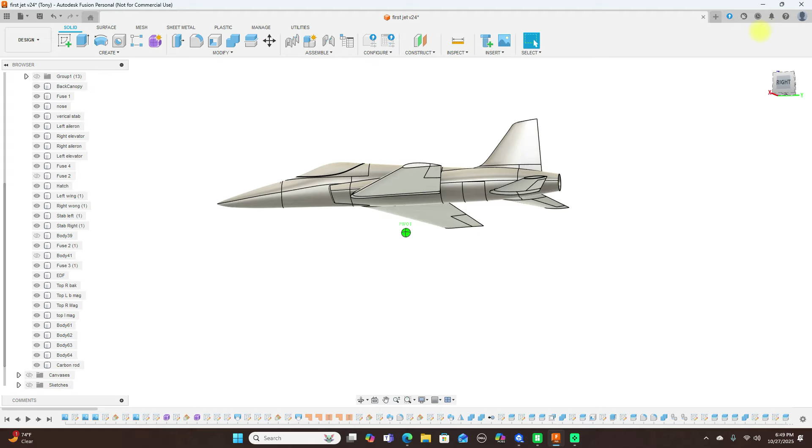Today we're going to be doing, sorry about that, we're going to be doing some more work on this first jet of ours. So, as you can see, we've done a lot. We've got our EDF in here, and this is all hollow here. So now we're going to work on the wing a little.

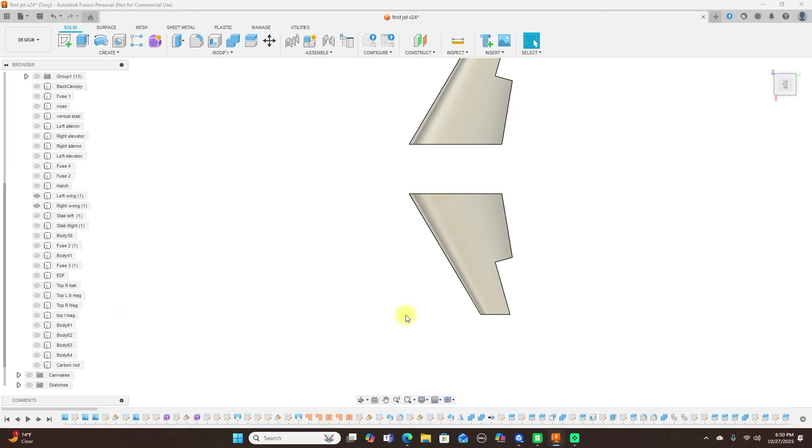Okay, so what I'm going to do is turn off all this and just leave one of the wings on. So if you've been following along with this, you should be up to this point where I am now. And turn off the right wing. Okay.

Now I want to see how long this wing actually is. So see if we can do a measure from here to here. And it's 249 millimeters. So most printers, you should be able to print this. So there's really no need to split this in half. So go ahead and close this.

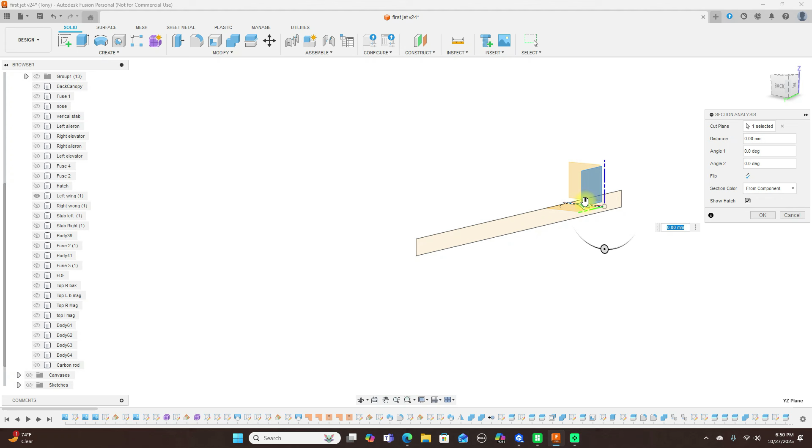And this should be a solid, which I'm pretty sure it is, but let's just make sure I haven't shelled it out. So we're doing inspect and do a section analysis. And this plane here. And it's still solid. Go and cancel this. Okay.

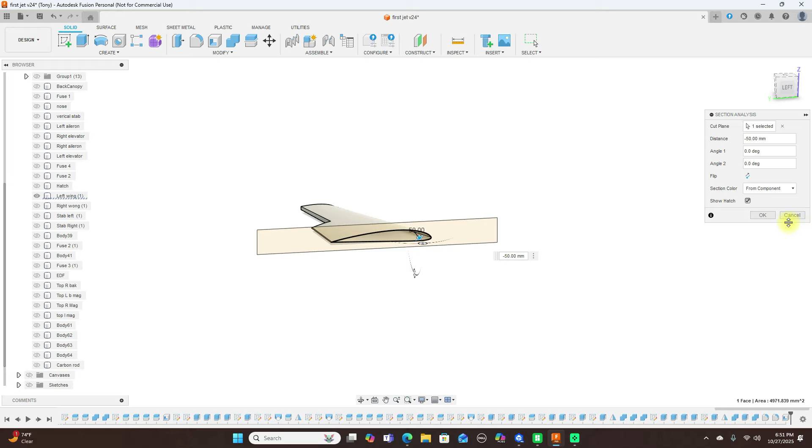Now we're going to shell this out. So we come up here to the shell command and select the whole thing. We want to shell this out to 0.4. And click OK. Now this should be shelled out. There was another section analysis. This here. And we can see it is shelled out now inside. Turn that off.

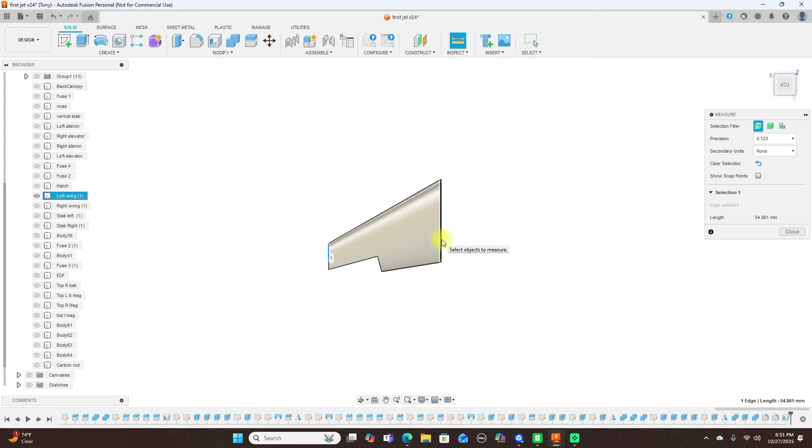Now I'm going to measure across here and see how long this is. Okay, this is 330. And cancel this. So we'll have to just split this in half. But right now we're not going to. So I'm going to create a sketch on this plane here. And turn off some of these other sketches. We don't need those right now. Okay.

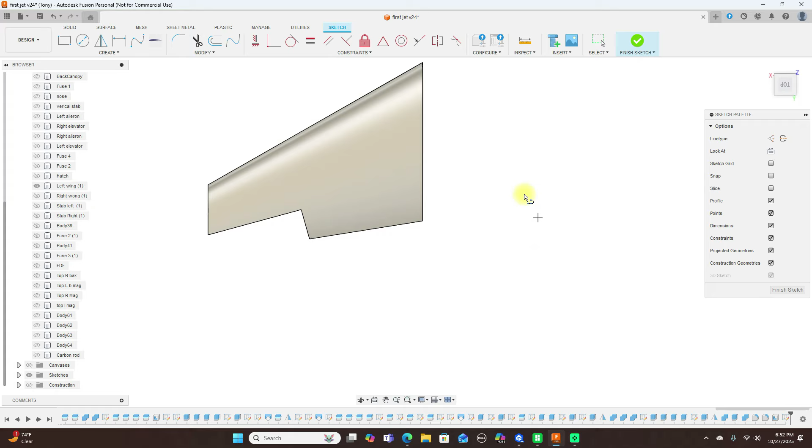Now I'm going to sketch a line to about right here. And I'm going to make a parallel one off that, so I'll use the offset here and move this up 5 millimeters. And finish sketch.

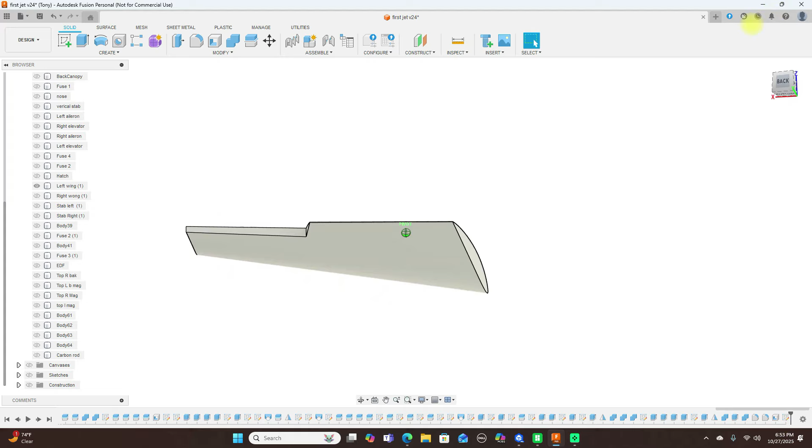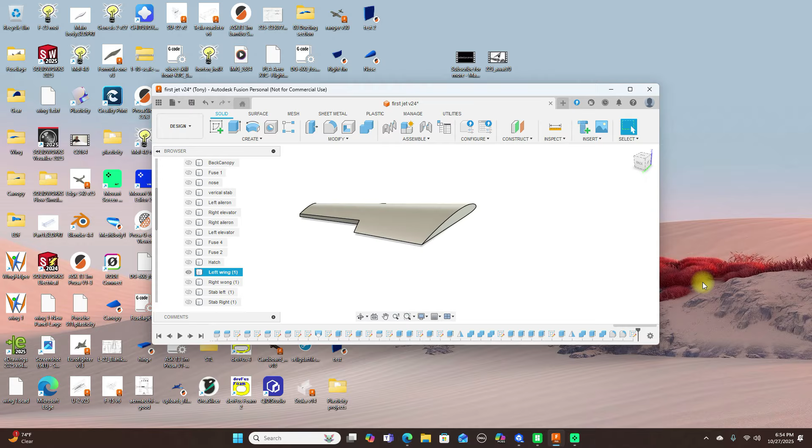Now what I should have done before hollowing this is your box for the aileron servo. So in order to do that, I'm going to go back. Take this, delete that. Okay, now this should be a solid again, so let's inspect it. And it is solid. Cancel this.

Okay, now we're looking at the bottom of the wing here. Now we need to decide where the servo is going to be, the servo box. So I'm going to put that right up here. So I've got a servo here I'm looking at, and the box I'm going to use for it is 45 millimeters by 60, 45 by 60. So

create a sketch on this plane. And we're going to use a 2-point rectangle. Okay, there's the box for the servo, and I want to move this. Let's go and finish this, turn the sketches back on, and move copy and change this to sketch objects. And select all of these.

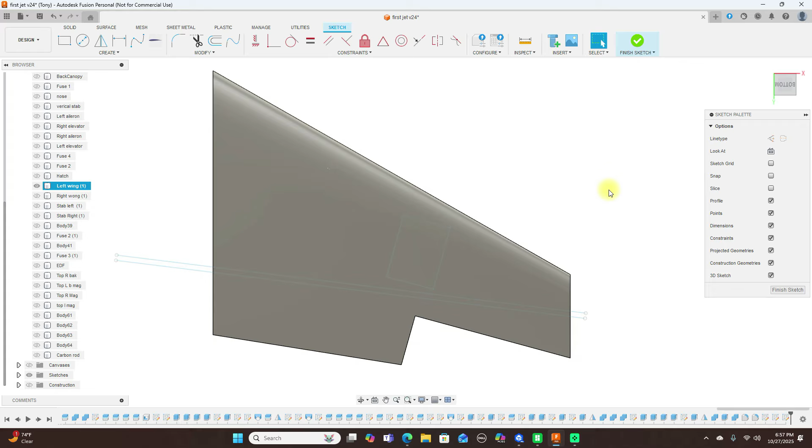Also, what I want to do is round these. So going to create a sketch on this plane here. And project this onto it. Click OK. Use a fillet. Now it won't let me do that, but that's no problem. What I'm going to do is use this here again. Or actually, cancel. I'll just use line so I can do this.

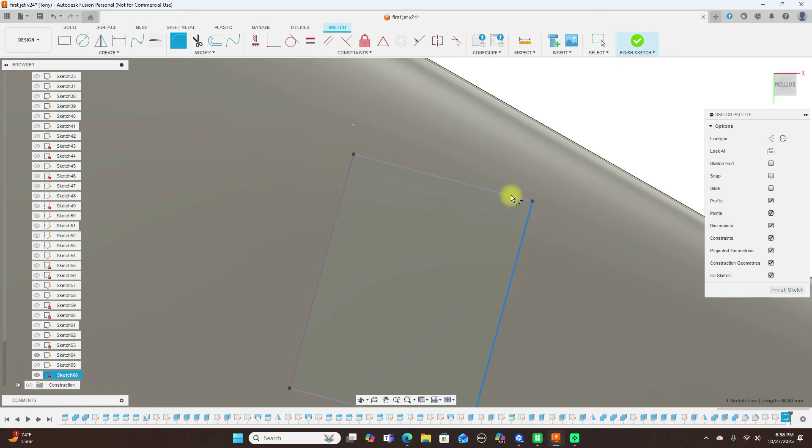Okay, now so it will let me put a fillet on this. Nope. Oh well, no worries. Go ahead and finish sketch here. And see this is on that plane there.

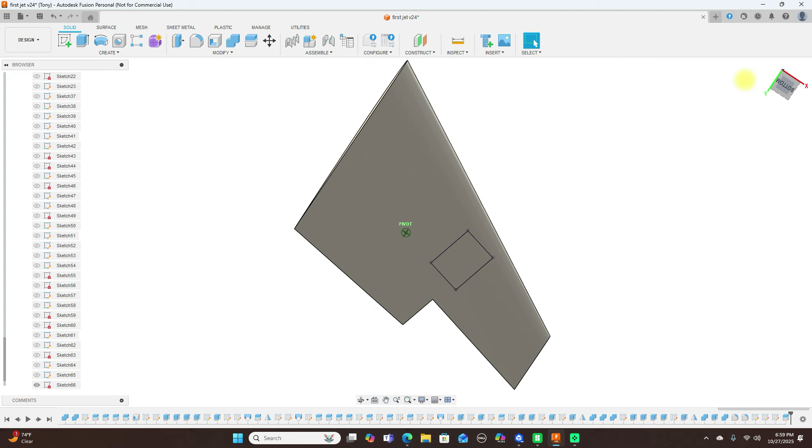Now what I'm going to do is split body and use this and select OK. Now that's split all the way through. We don't need it to be all the way through, but

so now what I'm going to do here is create a sketch on this plane if this is flat, and it's not flat. So I'm going to use, say, press pull, select this, and move this down. And that's too much. We're just going to go with 1 millimeter. And click OK. And we have that.

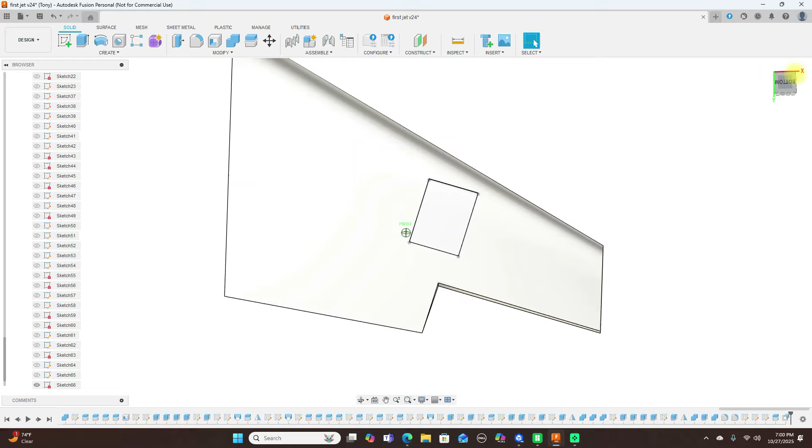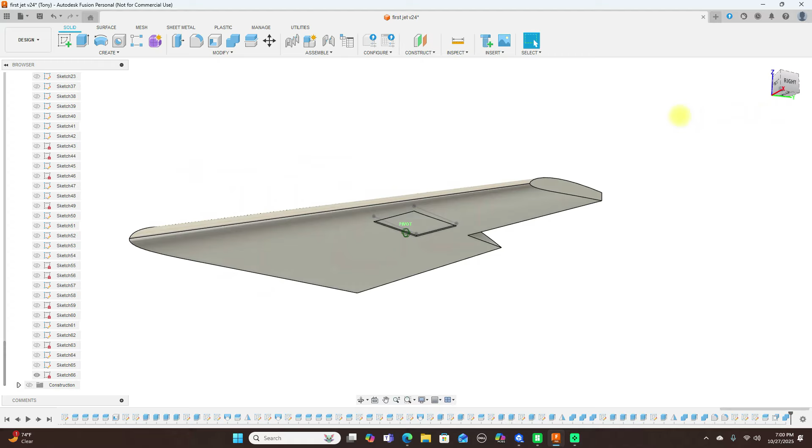Now we're going to combine this and this. Click OK. And we have that, and we have a recess down here, 1 millimeter, which you need. Now we can go ahead and shell this. So we come to the shell command, select this, and this is going to be 0.4, and click OK.

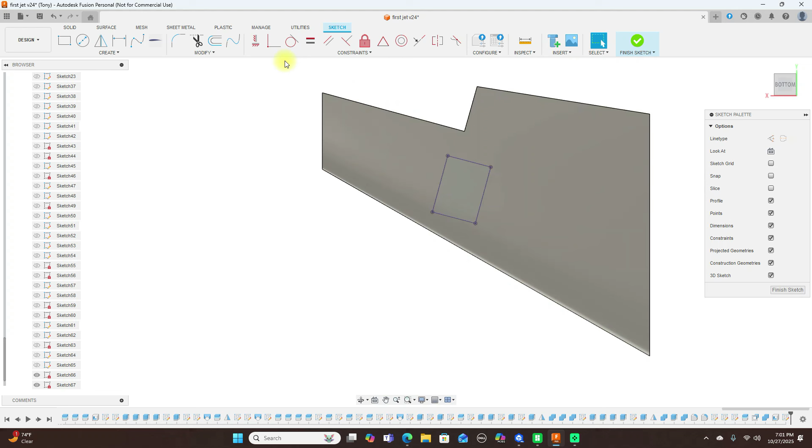And now what I'm going to do, create a sketch on this plane here. First project, cancel this. And use an offset. And move this in. -5. And finish sketch.

Now use extrude. Extrude this in. Set this to cut.

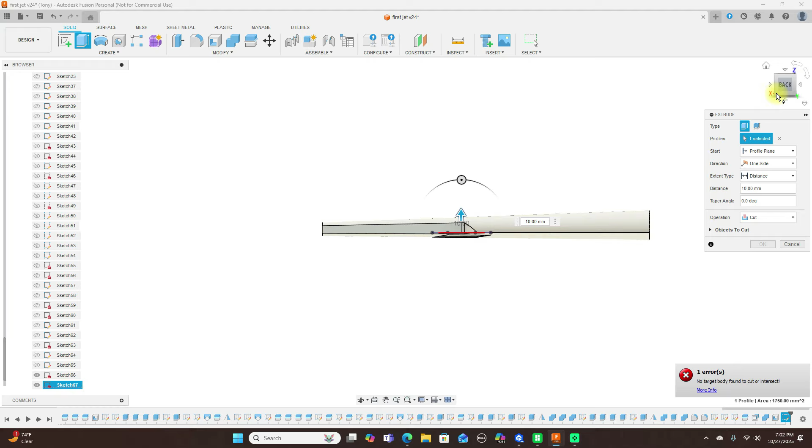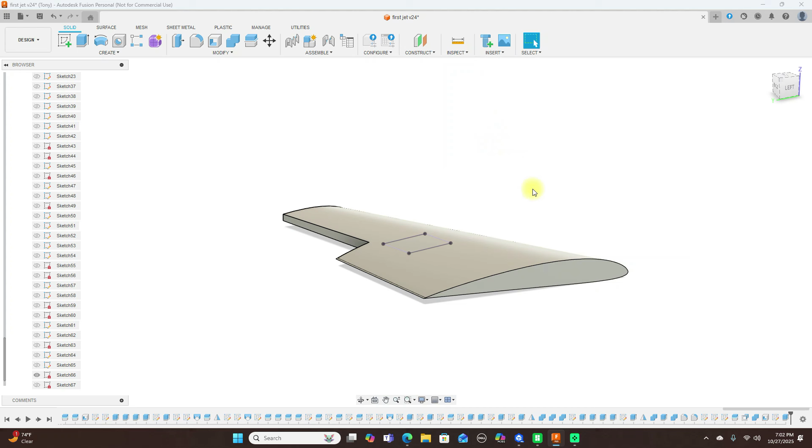Select OK. Now let's take a look at this. Section analysis. And you can see, let me turn off the sketches here. We can see inside of here where it's recessed and everything like it should be. And that's part of the hatch for the servo. Go and cancel this.

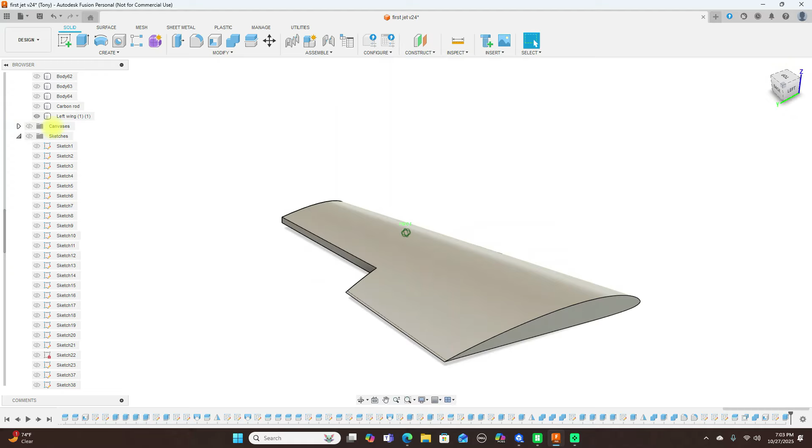Okay. Turn the sketches back on. Not that one. That's the one we want here. Now we're going to use extrude again. And change it to thin extrude and select both of these lines here. And change this to 2 sides. Move all the way up, all the way down, and change this to new body. Click OK.

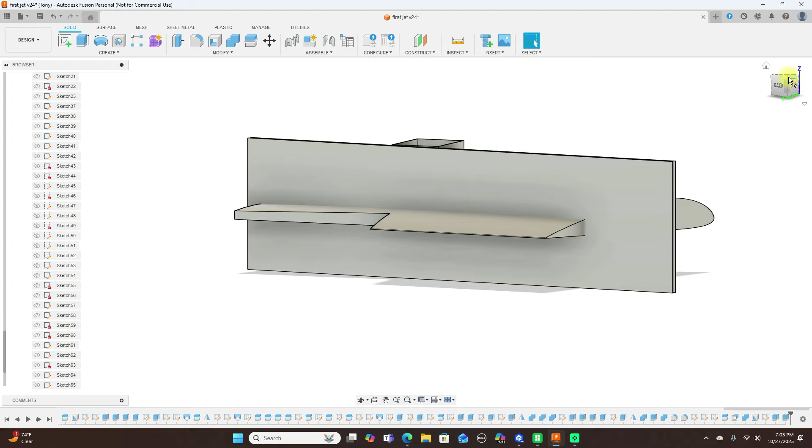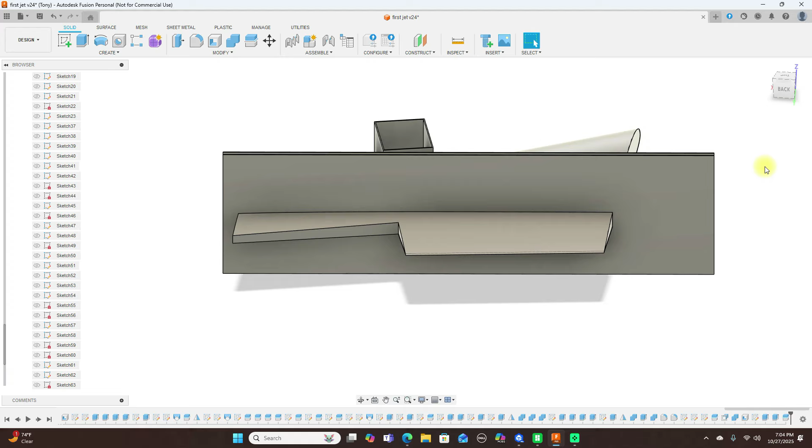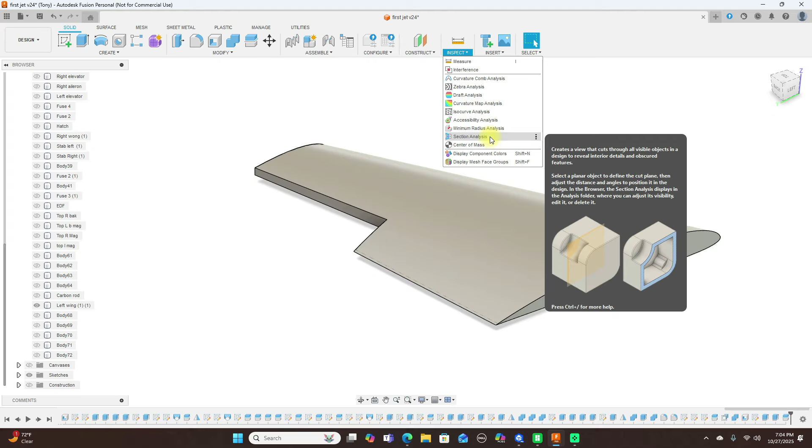Now we're going to split body. This is the body to split. This is the splitting tool, and select OK. We have that in there. Doing inspect, section analysis. And then we turn those on. And we see those down in there. Go ahead and cancel this.

Now when I extruded those, again, let me go back here and show that. Now the wall thickness, you can change the wall thickness. Here it's just 1 millimeter that I use for both of these. And I'm looking at another model and that looks about right. So we'll leave those alone.

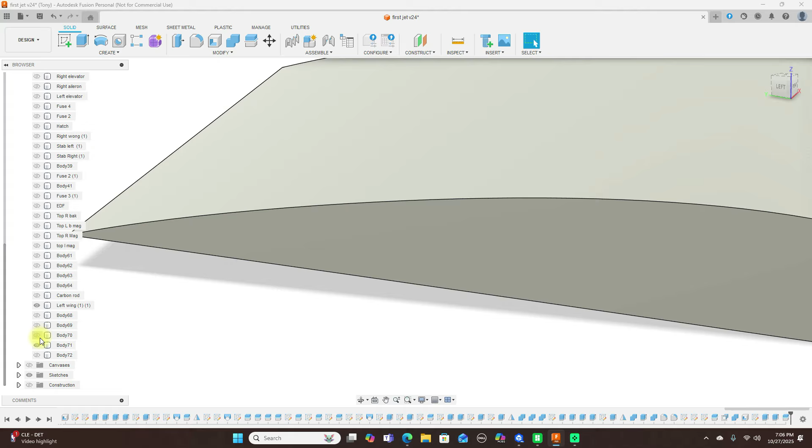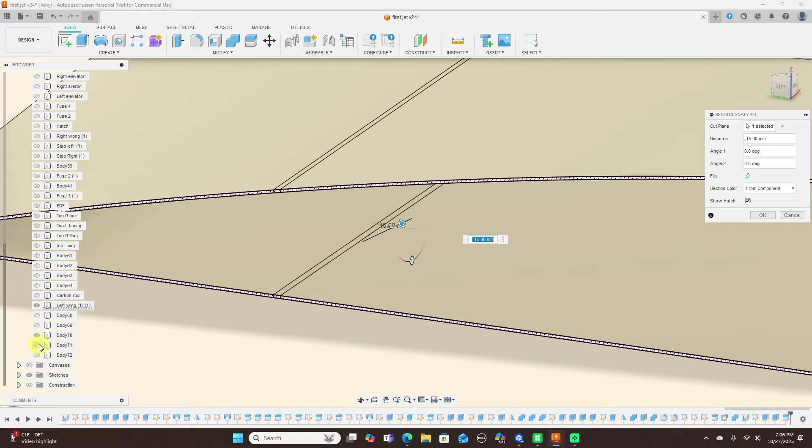Take a look at this again. Turn that off. Click OK. Now again, that should be in there.

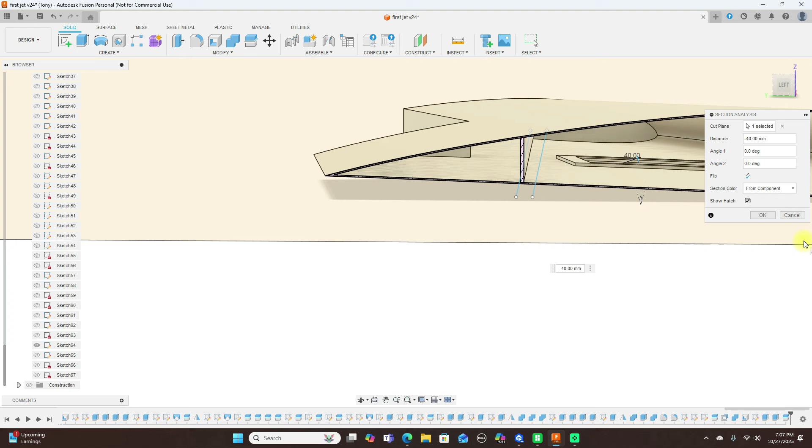The one line did not extrude, but that's no problem. Just go back and do that. So extrude, thin line, and leave it at 1 millimeter up. And change this to 2 sides and move this one down. Change this to new body and click OK.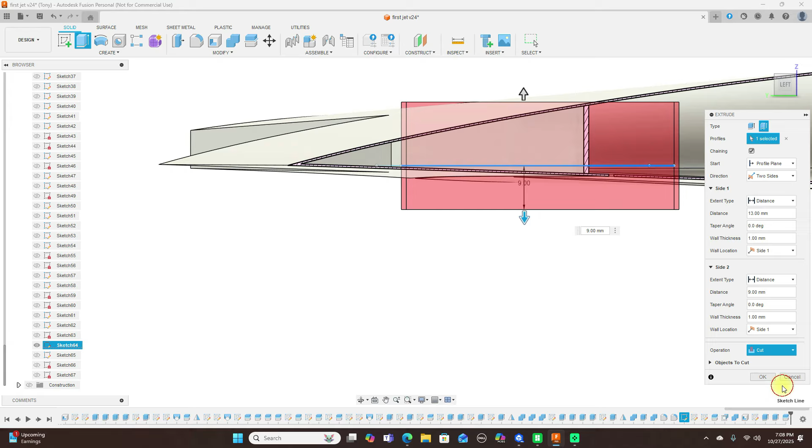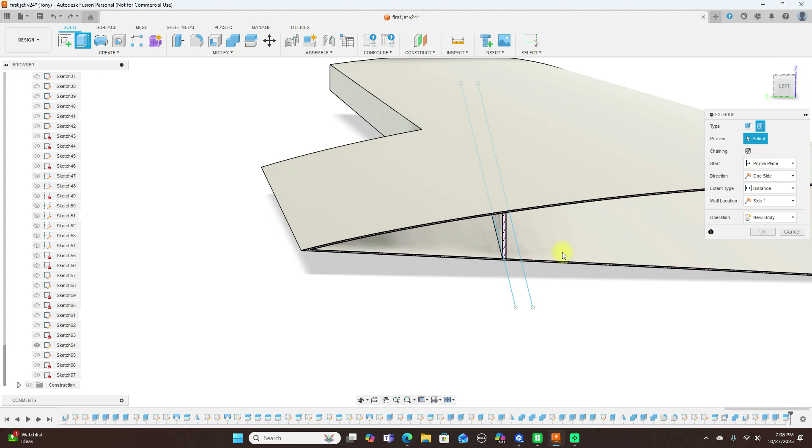Looks like that didn't go all the way through, so go back, extrude, thin line, new body, click OK. Turn off the section analysis. Now split body. This is the body to split, and the splitting tool is this. And click OK. Now we turn these off.

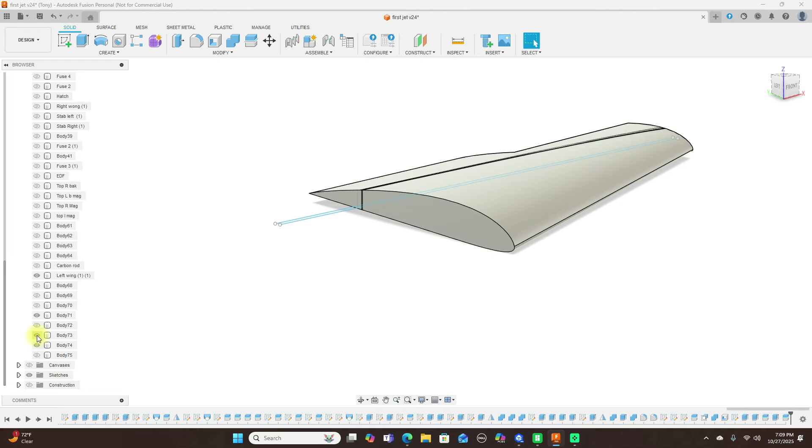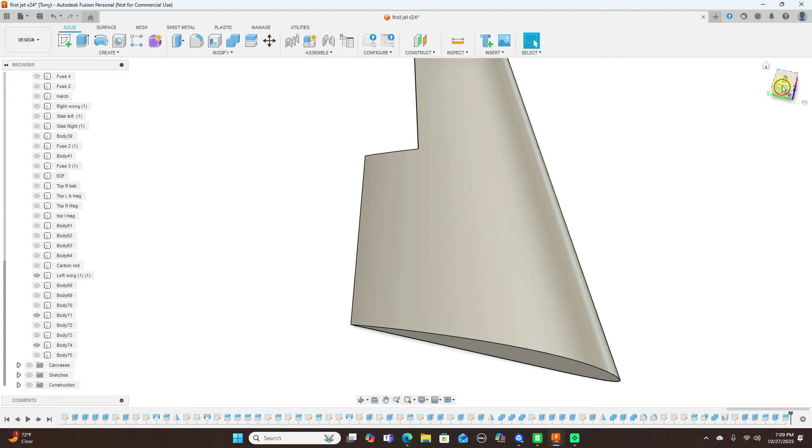And now let's look inside of here. Okay, you see both are in there now. Turn off the sketches real quick. Now, when you print this, these lines may show up, depending on your slicer program and how you have it all set up. But what I like to do is turn the left wing off here, so we have these two on here.

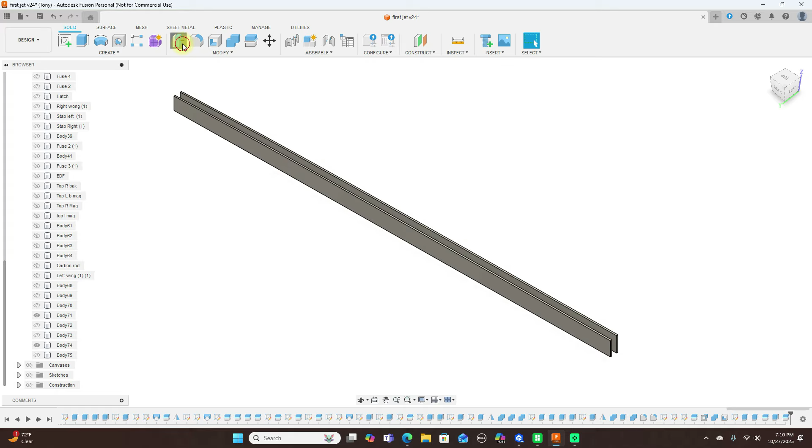I'm going to use a press pull, select this, and move this down. Move this down 0.25. Click OK. Same thing for the other side. So it's negative, sorry. Click OK.

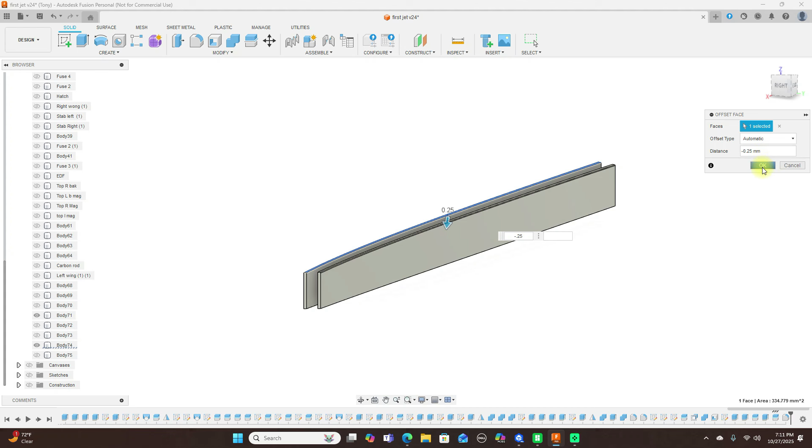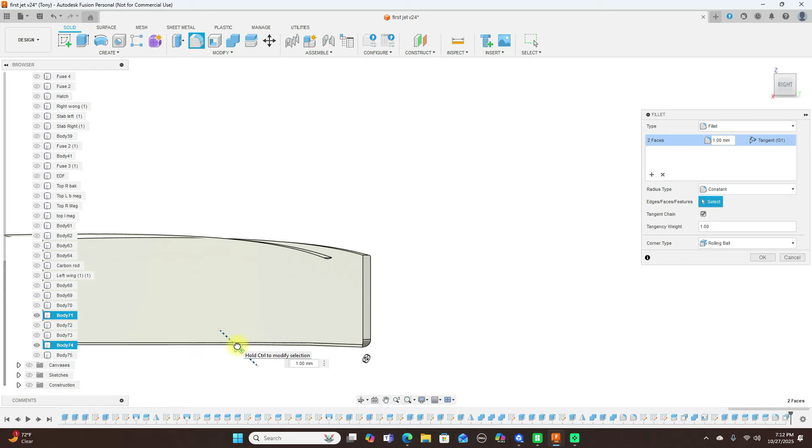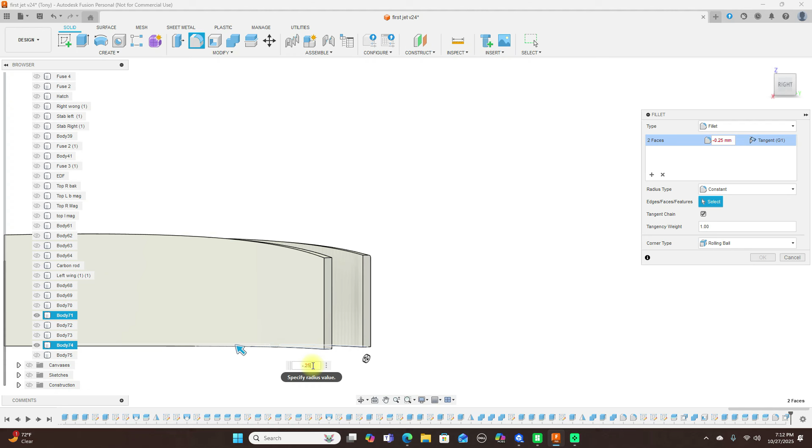Same thing for the bottom. Make sure I have this selected correct. The right face. So okay, it's not working properly, but no problem, cancel that. And I'll do it again one by one. And you could use an extrude to do this also.

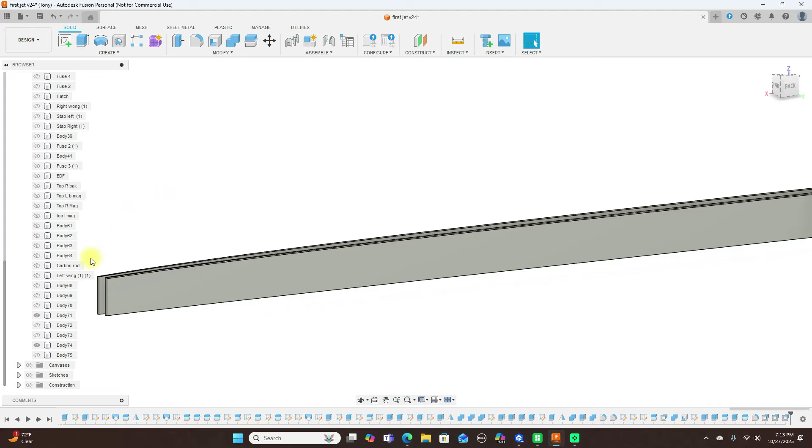And this one. Okay, we have that. Now we turn that, I believe that was the left wing, back on. And this time we'll come up here to combine. This is the target body, and the tool bodies are going to be these two in here. Make sure I got both of them. And we want to keep tools. And click OK.

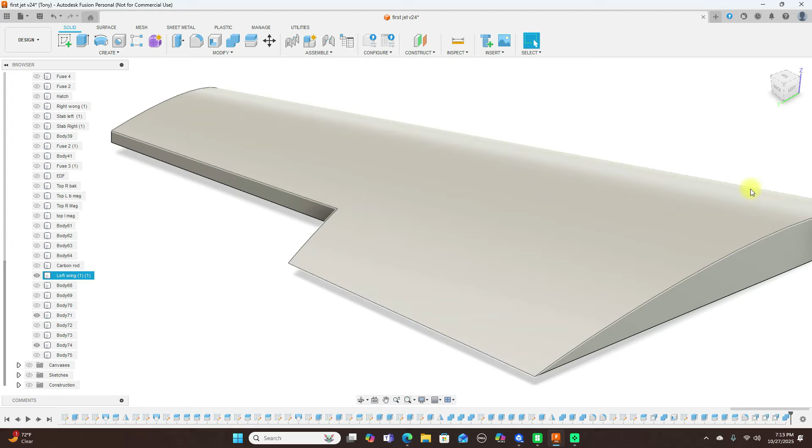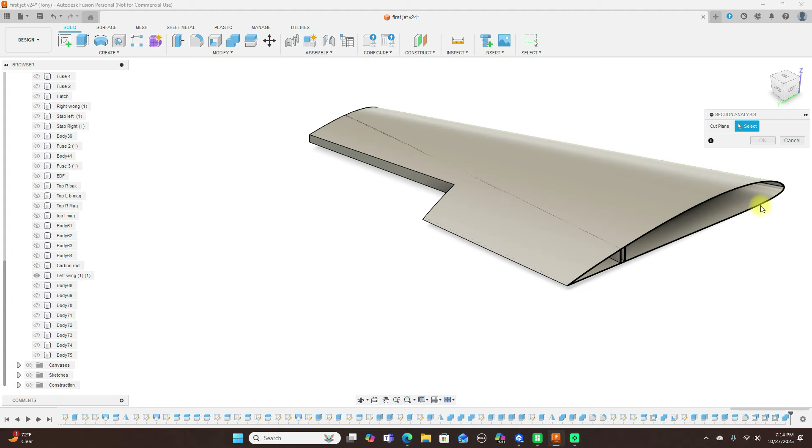Now let's inspect this inside. And we have that. And that line should not print on the top because it's down inside here farther. Okay, well, one of them I see I didn't offset enough because there's a sweep here. Okay, so to fix that, let's go back. Let me turn this off.

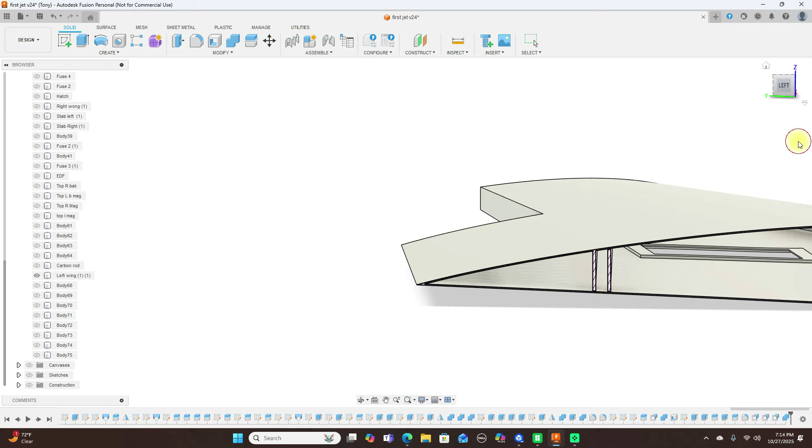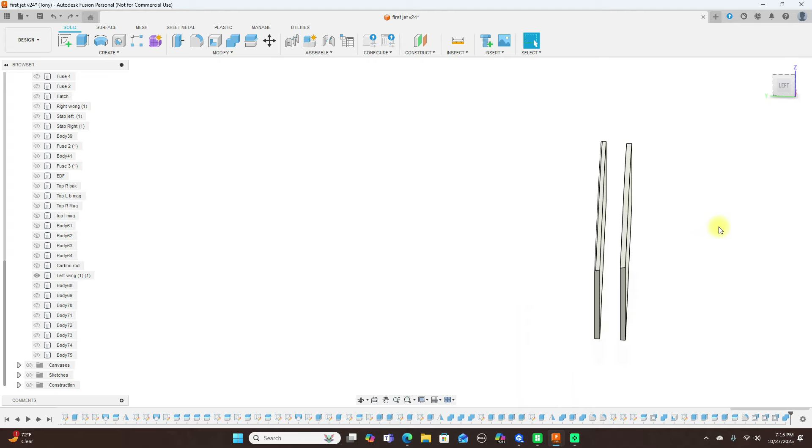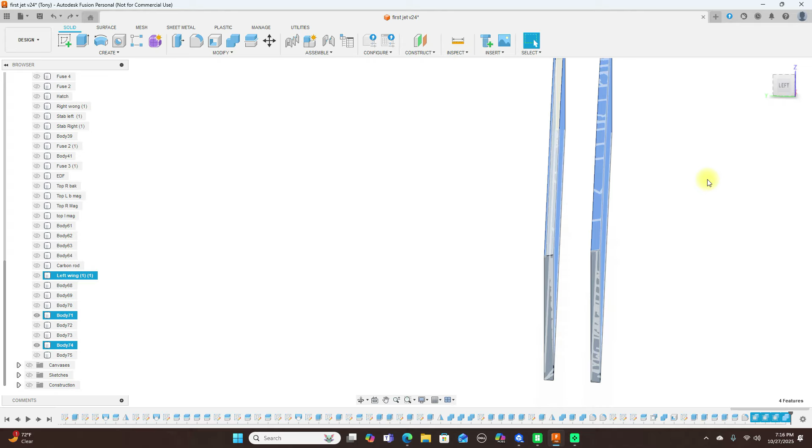And press pull again, this. Cancel that. Can we extrude it? Let me cancel all this and just go back to it. And think about this for a sec. I'll just do it again. I just deleted those, is what I did. So now, do that again.

I'm going to move this down to negative 0.3. And this one, negative 0.25. Okay, and turn that wing back on. Okay, now we don't see those.

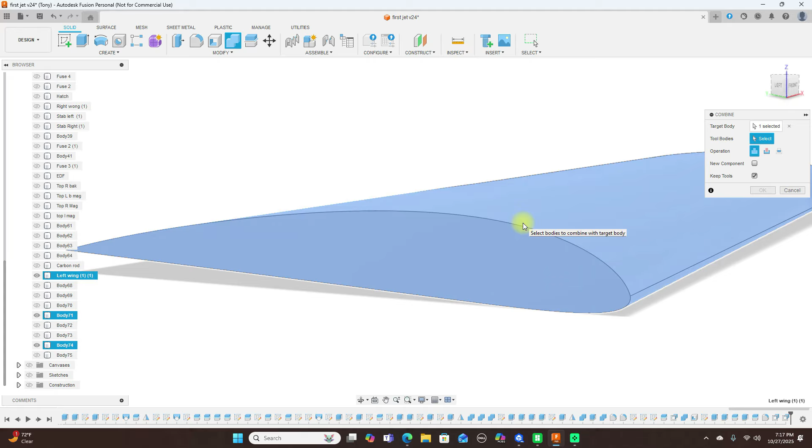Now combine, this is the target body, and then the tool bodies are going to be these two in here. Okay, it's only gonna let me do one right now. Then do that again. Target body, and that tool body.

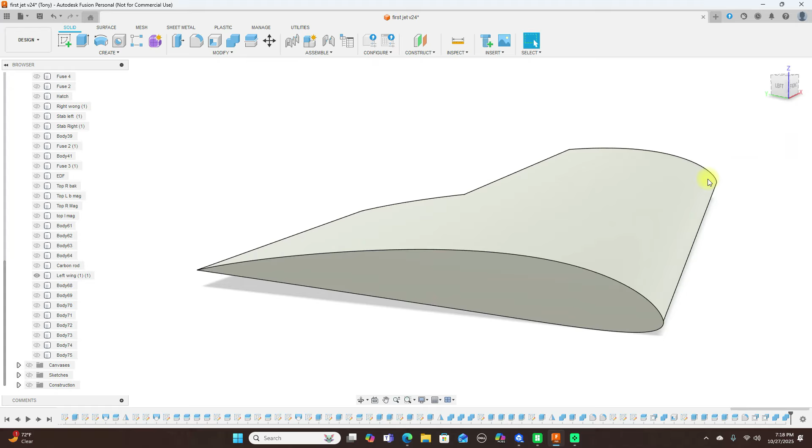Okay, now let's do a section analysis here. And we have both of those. And we've turned the wing off. Those are combined with that now. And now we don't have those lines on the top. So when you do print this, the lines will not show up because they are down lower inside there.

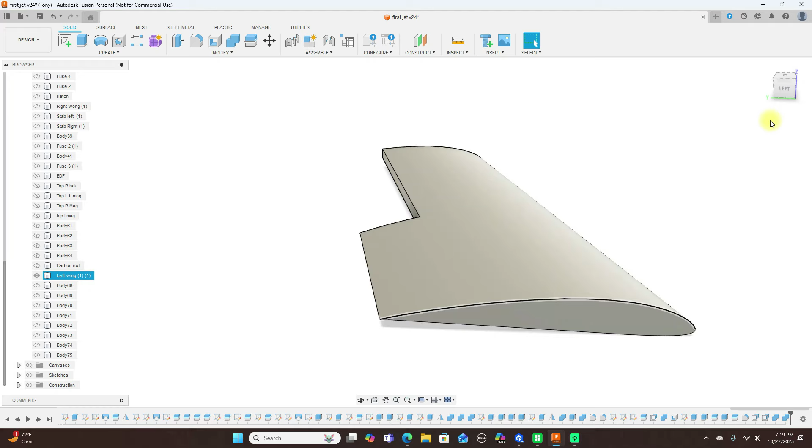And this is part of how you set things up to print in vase mode, but I'm not going to show you how to do vase mode in this video. I just want to keep it simple. But that's how we got that so far. We've got those in there. So now, okay, this is our wing.

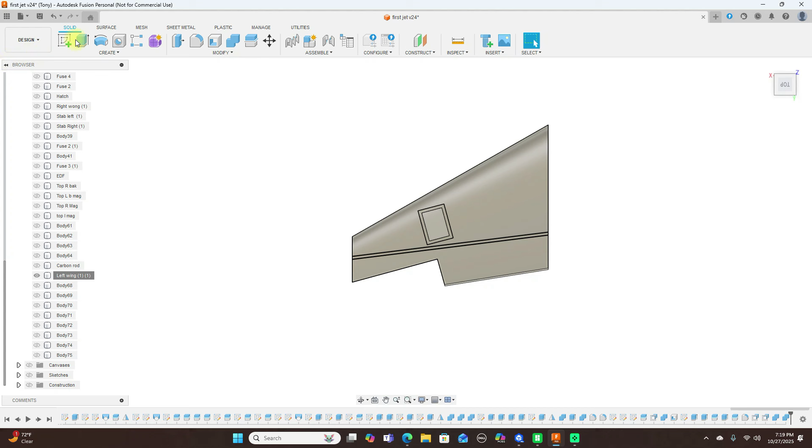Now, we're going to put more formers in here. So we're going to create a sketch on this plane here. Sketch a line. And however many of these you need for your plane or wing, just put as many as you need.

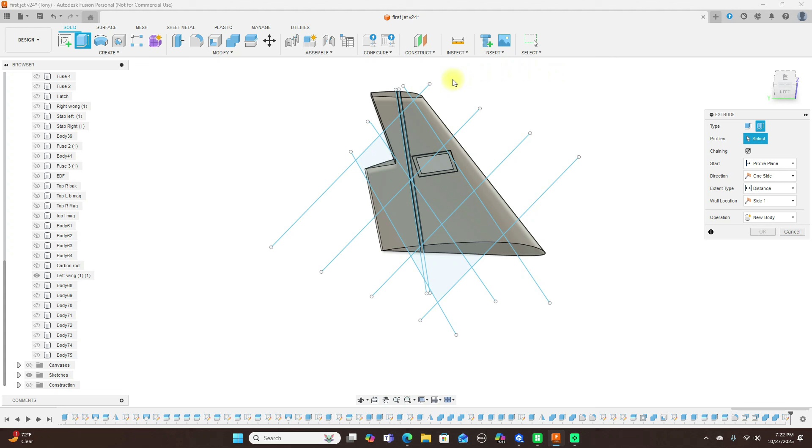And finish sketch. Turn the sketches back on. And we're going to extrude all these lines here. There are simpler ways of doing this, but this is just easy. So just extrude. Change this to thin. Change this to 2 sides. Pull this up. Pull this down. Doesn't have to be that high. Change this to new body. And click OK.

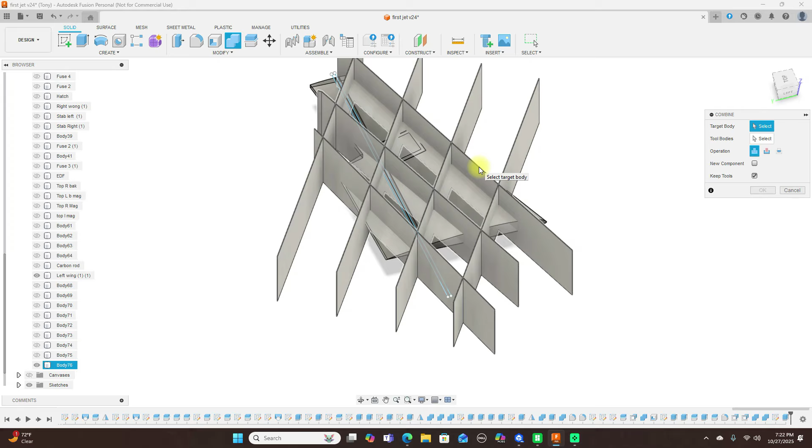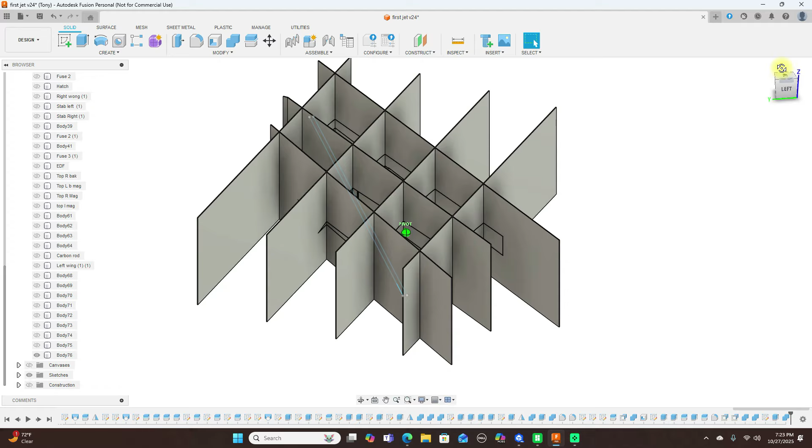Target body. Tool body. Okay. Now we can see here that when I extruded this, it made it all one body, and that's why we can't go in here and do this. So what I'm going to do is just go back. Turn these on and just do one at a time.

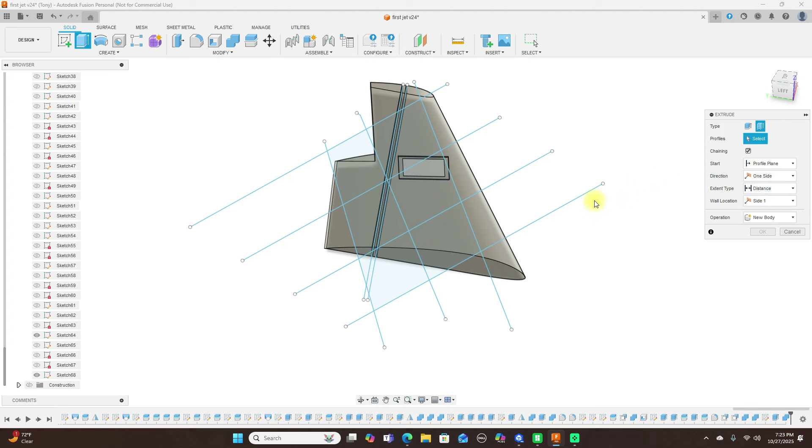Extrude, then extrude this. Change this to 2 sides. Pull this up, pull this down. Change this to new body. And now leave this, the extrude here is 1 millimeter. I'm going to change this. I believe that's a little too thick. I'm going to change it to 0.5. And the same with the bottom one that I did, and click OK. Now come up here, split body.

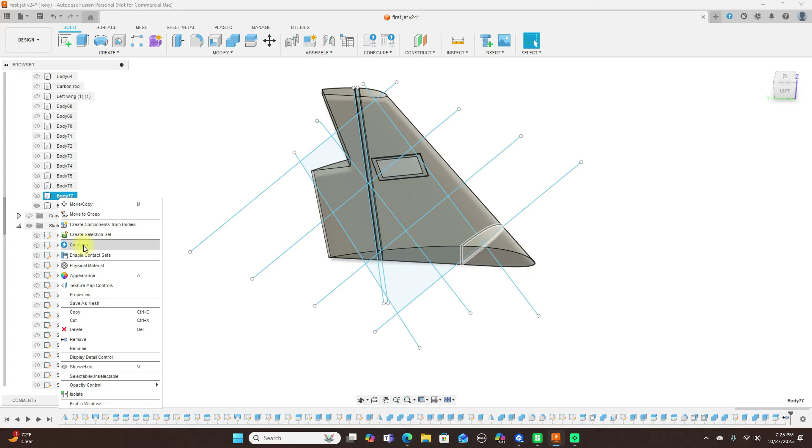This is the body of the split, and this is a tool. Click OK. Now turn this off. Actually, we just go ahead and remove it because we don't need it. And this is the outer portion of that, so we can go ahead and remove this also. And that should be the first former.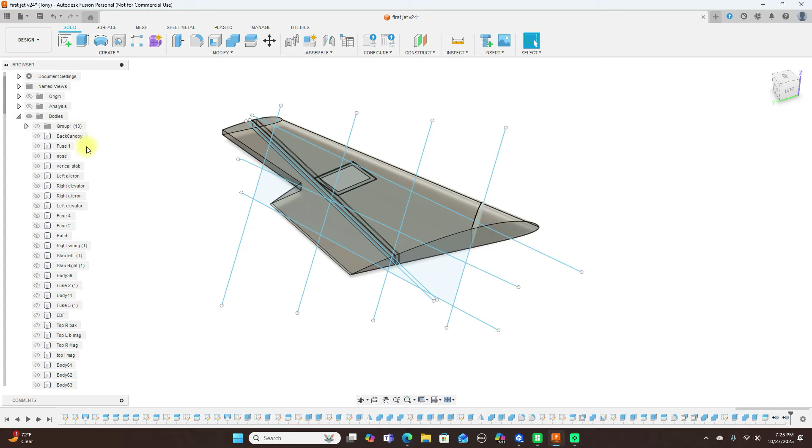Go inspect. Actually, just come up here because I had analysis on already. Not zebra analysis, but section analysis. Okay. And we have that piece in there now. Turn off the analysis. Turn off the sketches. Now, when we print this, you might see that line in there. But like I said, how I do it, I'll just go ahead and make it smaller.

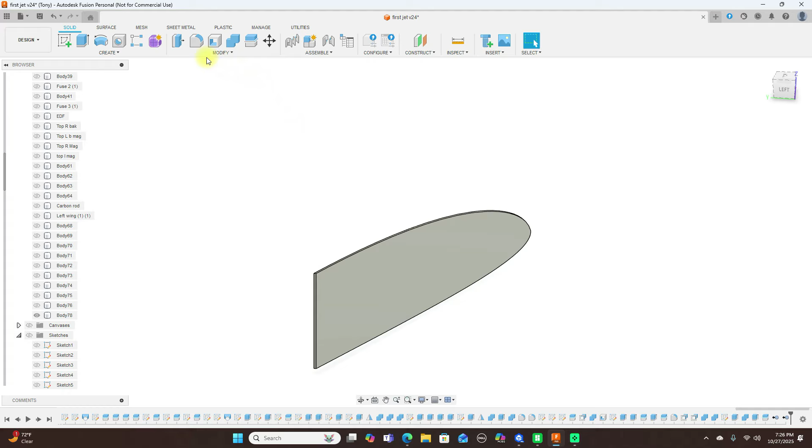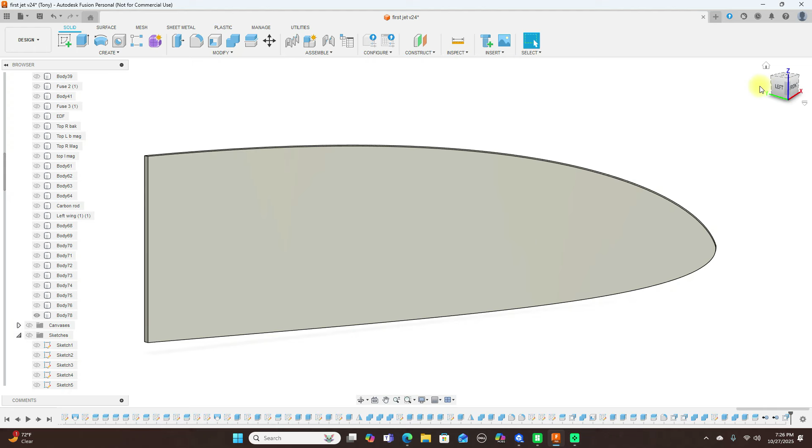See if we can offset the faces. Make sure we have the whole thing. And we do. And we're going to make this 0.25. Negative. Click OK. Then we turn the left wing back on. Okay, now that's inside there just like that.

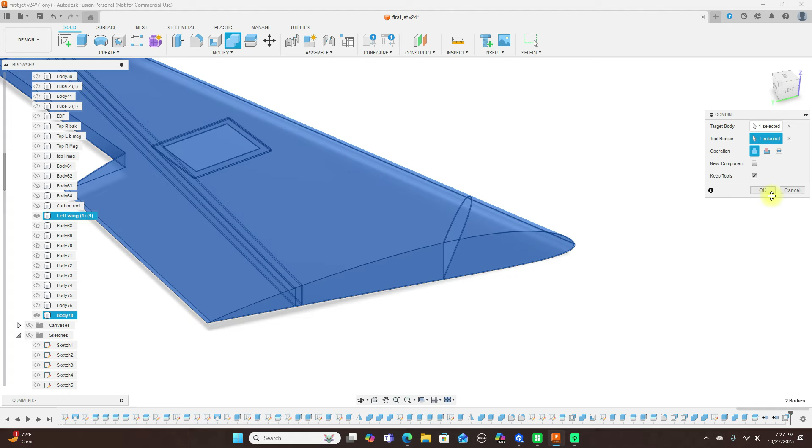And then we combine these two. This is the target body and the tool body is this. Change this to join and click OK. And now we have that piece in there too. Okay, I'll do one more former here. So we'll come down here, turn the sketches back on. And we'll extrude this one.

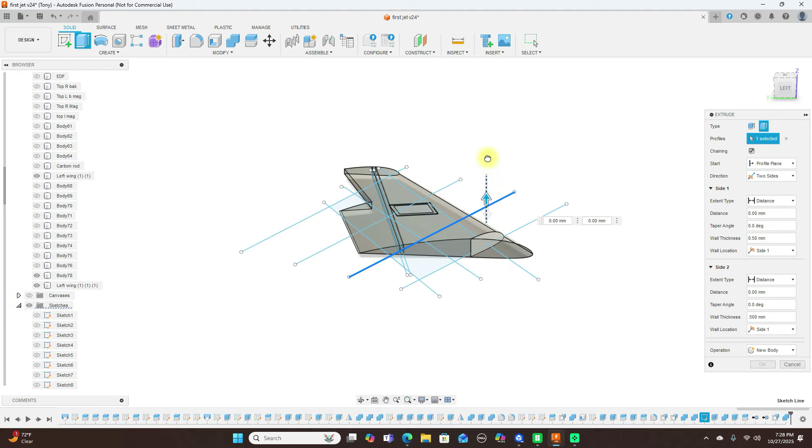Make sure you turn that to thin. Select the line here. And we change this to 0.5. And do this two sides and change this to 0.5 also. Pull this up, pull this down, change this to new body. Click OK. And turn the sketches off. Come up here to split body. This is the body of the split, and our splitting tool is going to be this.

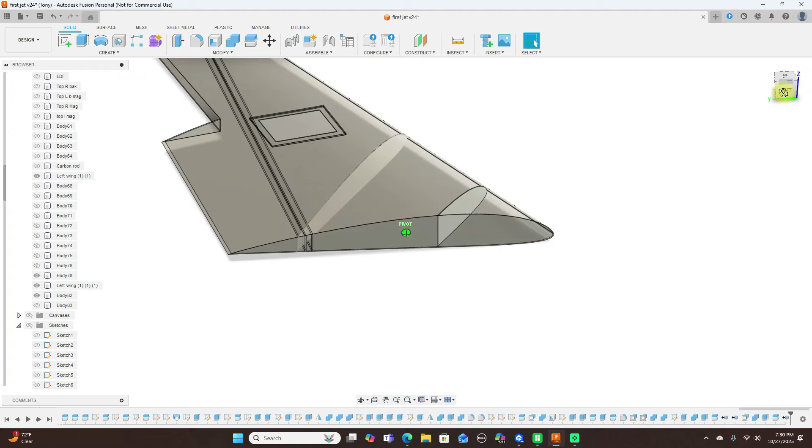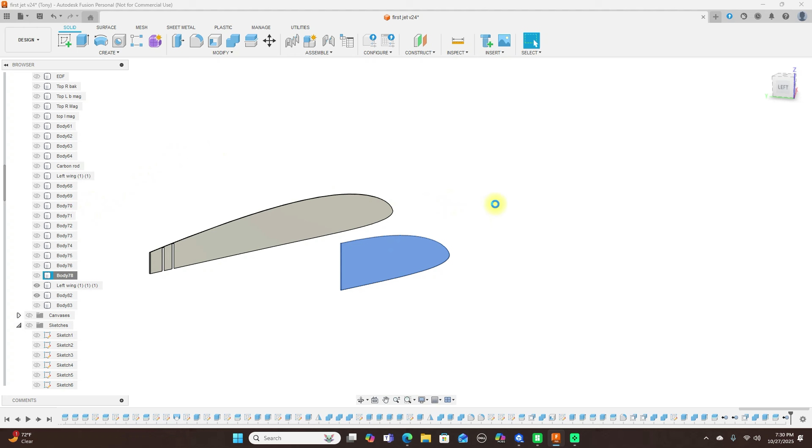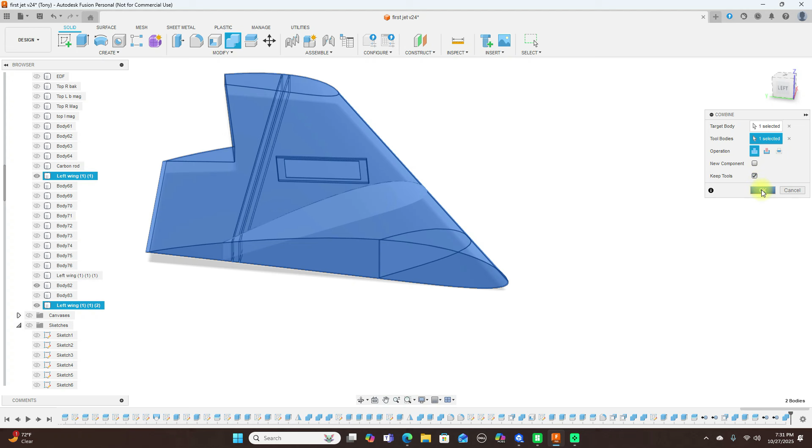And click OK. So let's see here now. Turn that body off. And we don't need this one, so just remove it. Now we have that inside there. And again, turn the wing off. Now this was a tool from the other one. So this one we don't need. I don't know why I did that, but oh well. But anyway, we have this. And that's going to do it for now.

Next week, or later this week when I come back to this, we'll do some more modeling of this wing here. And then we'll just go ahead and mirror everything over to the other side. So we only have to do this once. And the horizontal and the vertical stab are done the exact same way. They're just a different part, but they're done the exact same way.